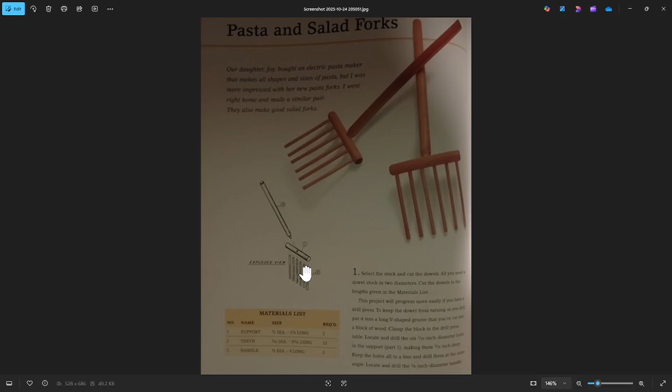So let me go ahead and show you this fork. It's a material list of 3 items. We'll have a handle, this is called the support, and then you have your teeth there. Let me show you the details. Here we go.

This angle right here, that 30 degrees, it's simple to place a handle at 30 degrees, but what I was trying to do is drill the holes out in this support piece here before inserting the handle. It's just an extra step or two that I do to help me increase my experience level a little bit quicker by trying not to take shortcuts. I think it pays off in the long run to learn these little nuances.

So let's get into it. Open up FreeCAD. Alright, parametric part, we'll start with that. And by the way, I'm not going to highlight my mouse anymore. I think when I'm looking at the videos, editing them, I can see the mouse pretty good. So if it is an issue, please let me know in the comments.

We'll start off with the material list. We had 3 items, so we're going to have 3 bodies. We got 1 body there now, so body number 2, body number 3. It's a support, we got teeth, or I'll call it a tooth, and a handle. Let's go ahead and get that.

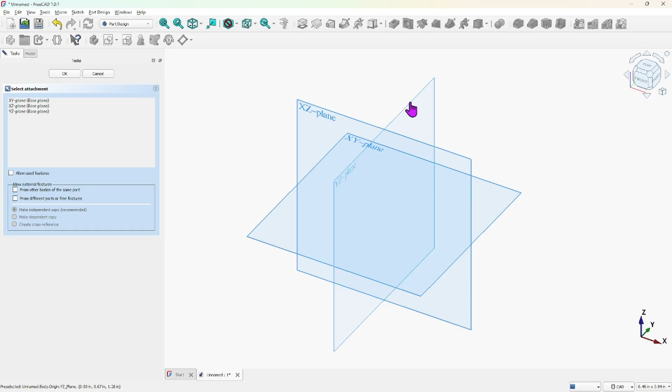And which way do I want it to face? I'll do it this way here. So I'm going to choose the YZ plane. Double click on that. And the support, this piece here...

Number one is 1/2 inch diameter, and it's 3 7/8 inch padded or in length. So 1/2 inch and 3 7/8. Go down to here, go back there.

Now earlier, I was trying to be smart and put the diameter over here and the side of the circle tangent to this line here, because I thought I was being smart. I can come back and use this line or the edge or that plane to insert or drill into that support, and it ended up making it much more difficult than it needed to be. So you would not have wanted to watch that one. I can guarantee you that.

So let's go ahead and put this circle right there on that origin, and we know it is a 1/2 inch diameter, so 0.5, and that is fully constrained. That's an easy one. Close it, and then we'll pad it.

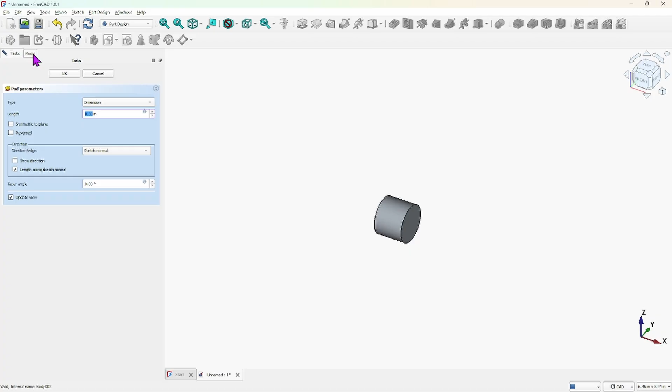Now I'm going to turn this origin on over here to show you that we're currently padding in the X direction away from this face, or that plane. Go back to task here.

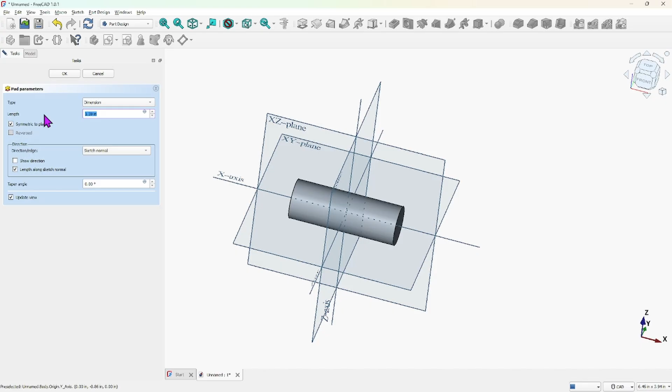What we want to do is use symmetrical, and that way you see that plane there. As you increase the size, it's going out on both sides, and that's going to help us center the handle when we attach it to this piece here or drill the hole for it. So that's going to set us up for success there. All right, the length is 3.875.

Roll back here. All right, so I just wanted to show you that. Let me go ahead and turn the origin off up here. That's off.

Select isometric view. All right, we now, or at least I want to drill the holes here for the teeth. So the hole is 3/16 diameter, 5/16 deep.

All right, wish me luck on this one. Because we can't just select that like I just did and do sketch. If you do that, you don't have a flat planar face to sketch to.

If you did it on this end, that's a flat planar, and you hit sketch, you could draw a sketch right on the end. So what do you do? You have to have, well, you could do a couple of things.

I could just start a new sketch and then use this XZ plane. But then when I tried that and moved the hole out to the side, it would not let me move it. It locked it. So what we have to do is create a plane and then attach the sketch to that plane.

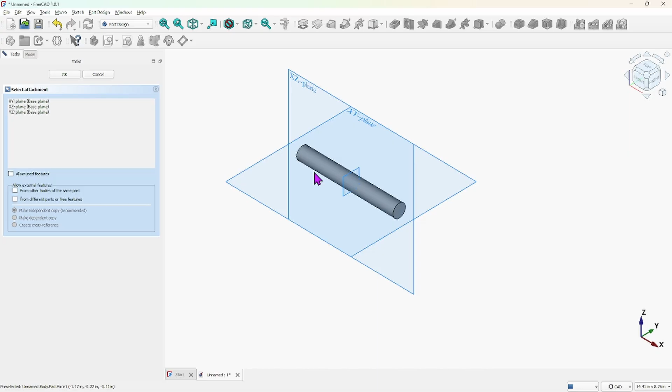All right, so let's do that. Cancel that. So before we can draw those circles, let me go ahead and get a plane.

Here we go. The plane is right there. Select a plane. The plane is deactivated. We need to select something to attach it to, and I am going to select this support or dowel. There you go. Now the plane is attached.

I have to have a way to spin that plane around though, because I can't draw the circle on it right there. So now let's work on spinning that plane around and getting it into position, and let's see what we can do here.

So in theory, the Z-axis is the vertical axis, and if you rotate the plane around on the Z-axis 90 degrees, it should position it where we need it. But it doesn't always. Yep, see, the Z-axis for this item...

This is something I'm still learning, but there's a variety of Z-axis. You got your original Z-axis, but then as you start drawing items, they internally have their own Z-axis. And obviously this plane, since I selected this, now it has its own Z-axis.

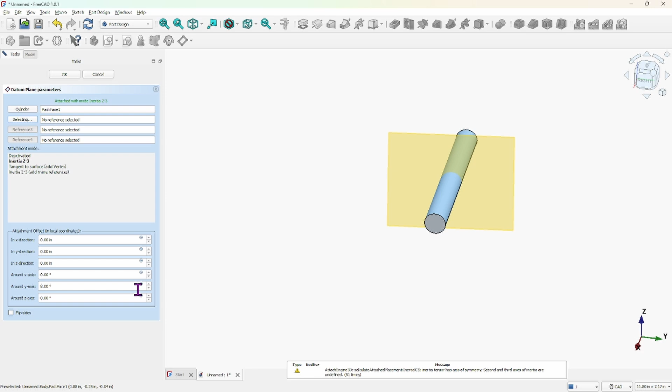No, it's not that, because you can see it's not using that. So I'm going to put that back down to 0. Okay, spin this back around. This then is probably what we're looking for.

X, let me see. Let me go back over here. Let me look at it in this direction from above, see if it's... Nope. Set that back to 0.

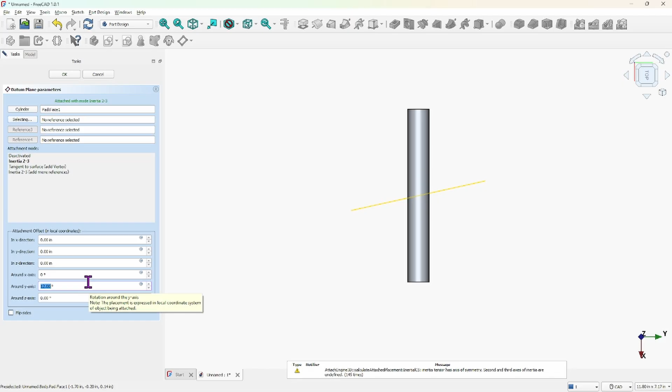Maybe it was the Y. Yeah, I think it is. Yeah, okay. So we want that to be 90. I'm just going to go ahead and type 90 while it's blue over on the left. Hit enter. Alright, isometric view.

Okay, there we go. So we have the plane in the right direction. Now we need to take that plane and move it to the left on the Y-axis. If the Y-axis is the same as the Y-axis for the plane, we shall see.

Alright, go on the right view here. I'm going to just skew the view a little bit here so we can see a little bit more of it. Alright, datum plane. I'm going to double click on the datum plane.

Now this time, instead of moving around an axis, we're going to move in the X, Y, or Z direction. I'm thinking in the direction of Y is what we should do. Let's see how that works out.

No, put that at 0. Let me try the X. Since X wrapped around the Y-axis, I don't know. Let me just try the X, see what happens there. Yep, that's what we want.

Okay, so it's already through the center of the support piece. So out to the edge here would be 1/4 of an inch. 0.25 is what I'm typing in this X direction.

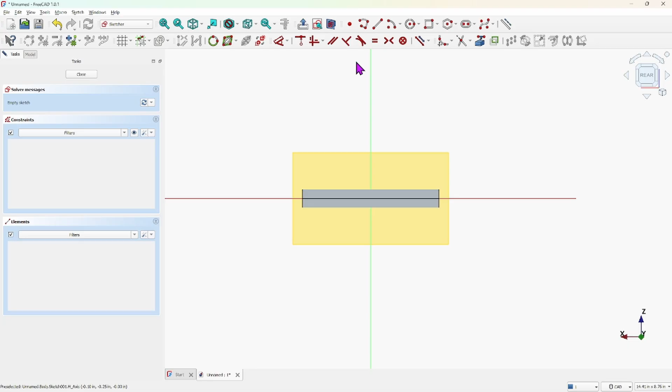This will get it out of the way. Hit that, and you can see it cleared it up right there. All right, so I'm going to start with that sketch there.

Let me look at some more information here. So it's a 3/16 diameter hole that we're going to drill into there, 5/16 deep.

Alright, grab that. 3/16. You can go ahead and type the fraction in there, hit enter.

Alright, we'll worry about these dimensions here in a little bit. I'm going to close it because I want to demonstrate something to you here real quick. That is strange. Why is it so far over?

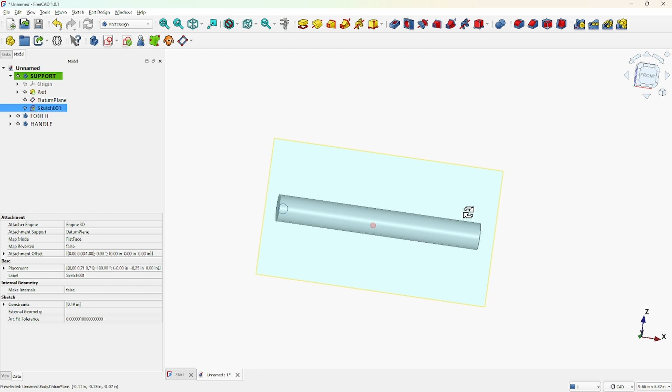Look at the datum plane. Make sure we got it right. Yep. Okay, sketch. Oh, okay. There you go, you see that up there? I didn't realize that I drew that off the edge. So I'm going to move it in some. Turn that back off, and I'm just going to drag it over. There you go, drag it over. Alright.

Alright, this is the fun part. I'm going to show you a couple things here. You know me, I'm going to try to show you more than one way to accomplish drilling the hole into this support or dowel, whatever you want to call it. So we're going to use the sketch, it's highlighted.

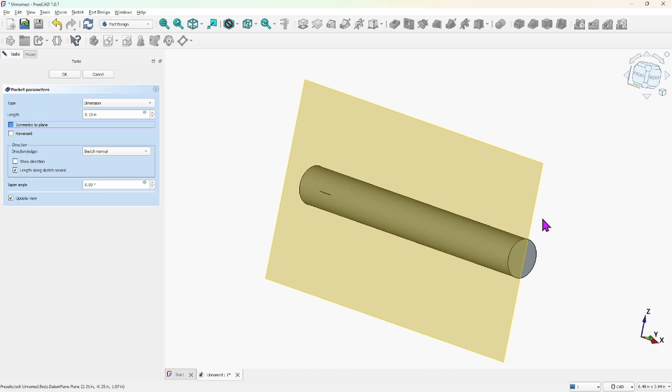We're going to use the pocket command, and something is not going right. Leave the length along sketch normal. I'm going to do the symmetry to the plane. That's what it was - it was going in the wrong direction because we sketched it on the rear side.

Let me put a negative here. Let's see if that does it. It will not allow a negative. Alright, so we will reverse it. That's why it won't allow a negative. We'll just use reversed. Okay, alright.

And it did put a pocket in there. So let me try to explain what just happened so hopefully you'll understand it.

Okay. When I selected this plane here, it should have been on the front right there. So let me go back to the sketch. There you go. Alright, but it flipped the plane around to the rear.

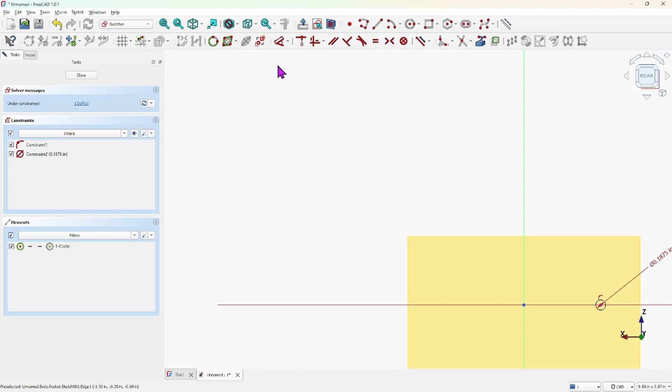So when I drew this, it was expecting to pocket starting at the rear and working its way forward to the front. And that's why when we did that - let me close it - over here to the right is the rear, and we drew it on the back side of this plane. We drew it on this side, and when we pocketed it, it was trying to go into the screen, I guess you could say, from where we drew it.

Like we drew it from here, and it was expecting to go to the left. And so what we had to do, since it drew it on the back side, I had to come up here and do the reverse on the pocket. Right here, there we go.

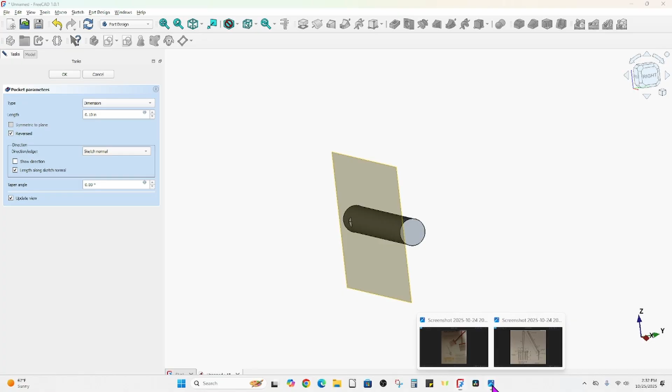So now that that is explained, the depth is 5/16, I believe, if I remember. 5/16 deep. Okay, let's go ahead and do that. Alright, so the length here should be 5/16. Enter that.

And you can't see the hole there, but we're going to make it transparent so that you can. And while I'm at it, this plane right here, I'm going to come up here and select that eye and make that plane go away. We were just using that as reference to put this pocket in there.

Alright, I'm going to select the support, come down here to view, and transparency. I'm going to set that to 60% down here, so you can see through the support and look at the hole we drilled.

Now, normally - and this is where I just can't let little details go, I guess it's my nature - that doesn't have a taper on it, like it would if you had a drill bit. So when you do a pocket, it doesn't put that taper.

This is the one you want to use right here, which is the hole. And when you select that hole, you have more options to add threads, countersinks, and things like that. And it'll act like a drill bit when it goes in. So let me demonstrate that to you. So I just wanted you to see that first.

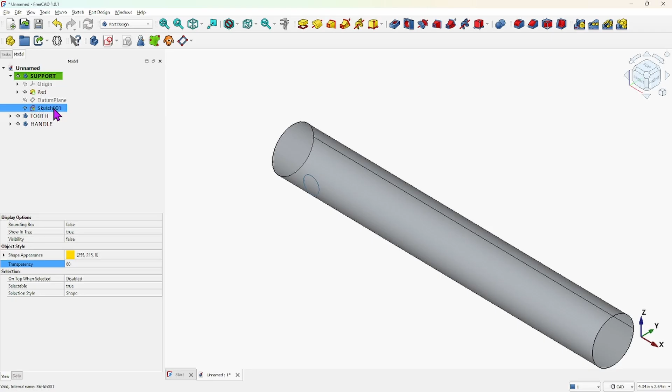Now let me see if the hole will work for me. Our datum plane is on, turn it off, select the sketch. The sketch is highlighted. Now I want to select the hole, and it's giving us that indication it gave before because we got to reverse it. Select reverse, and there you go. The hole went all the way through because the depth is set.

I don't know if that is a default or what, but we got 0.98, so it's almost an inch. We want that to go in 5/16. So I'm just going to left button, swipe over, and type in 5/16. Then I'm going to click out here in the 3D model view, left click, and it'll update the view. Now look, there you go. That's what I like to see, it feels more realistic to me.

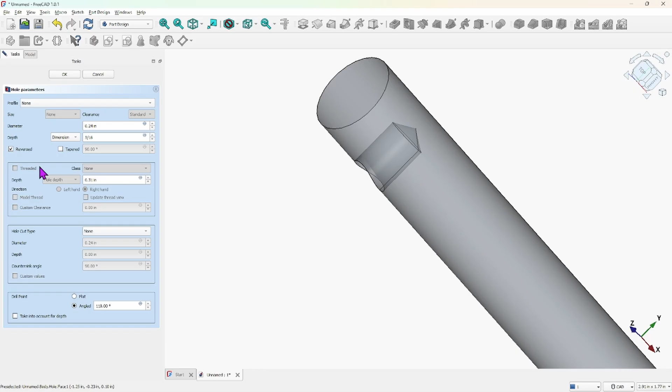This information down here is not something we really want to get into today. If we were doing machining, I think we could show some threads in here, but you'd have to come up here and select a profile, like which one of these standards you want to use. An ANSI standard is probably what we would use here in the United States. But for right now, the profile is none, so I don't think we have that option to add threads. It's something you can play with if you're familiar with fasteners. It's something I'll probably get into at a later date.

Hole cut - look at that, you got counter bore, countersink. I guess the counter bore, you can go in and flatten it out, and the countersink, I think you know what that is. The counter drill, I'm not 100% sure what that is, I'd have to look that one up. That's my background, mechanical, so I should know that. I guess I don't use that one enough.

Let's talk about the taper and the depth. Because the rod, or the tooth I should say, when it gets inserted needs to bottom out, we want the edge right there to be 5/16 from here to where you start, to this edge here. So the depth is 5/16.

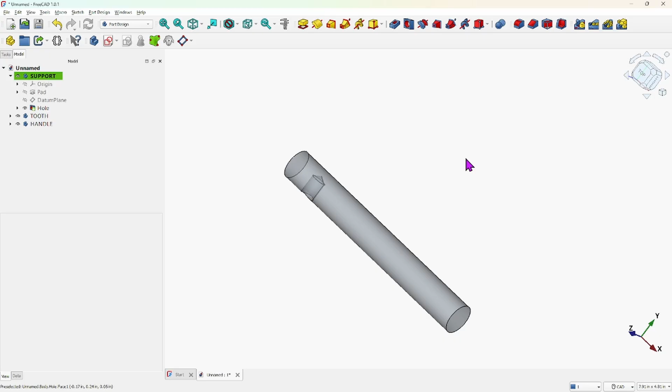So now we have to duplicate that across the support. But before we go there, I'm going to show you yet another way to put a hole in here, and that would be using this Boolean operation, which we're going to end up using for the handle, I believe. Wait till I get there. There are times when a Boolean operation might be your best friend in a situation.

So if I was to draw, just to show you another way, I'm not going to get precise with it. I'm going to start a sketch. I want to start a new body, and I'm just going to call that drill bit. Hit enter. And then now that that's active, select that. I'm going to select that plane right there.

Okay, on this line here, I'm going to draw half of a drill bit and then rotate it. Let me see, right click it out, then I'm going to use this, continuous. Alright, so we know that the tip - I'm just approximating right now - there, and to that line, and then close it, there.

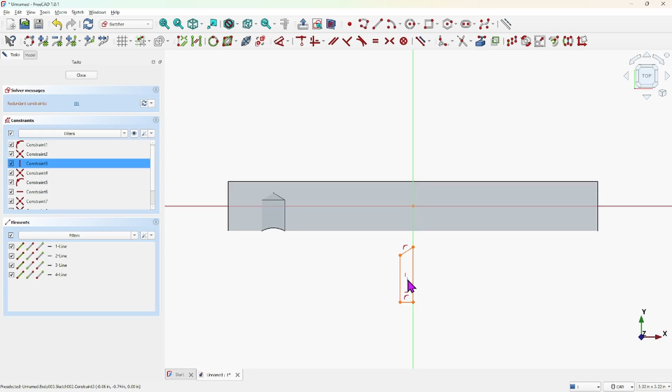Alright, it's over constrained because I attached these points to the axis, and by default it also gave it a vertical constraint, so it's over constrained. By selecting that and deleting it, I thought that would help. I grabbed the wrong one, let me back up. There you go, it should be this one. Grab that one, hit delete. There we go.

Now I am not going to take the time to dimension this one because it's just a demo, so I'm going to go ahead and close it.

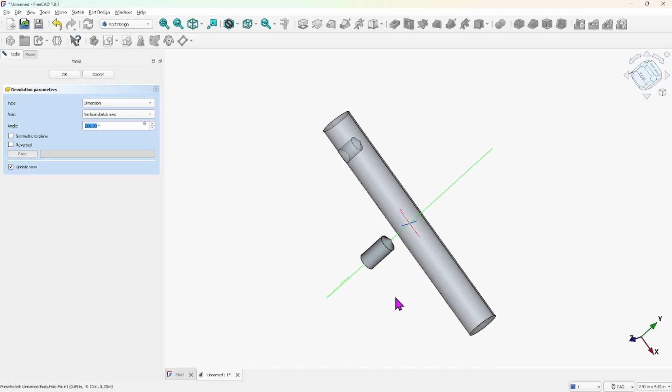Now what I want to do is rotate this to make a drill bit. The sketch is highlighted, hit rotate, and there, it rotated on that vertical sketch axis, I think that's the default. You can also pick other axes. It may or may not make sense when I do this, but for instance, there you go.

That shape was revolved around the x-axis. There it is, revolved around the z, but we don't want it around the y. Well, yeah, I guess we do want it around the y, because it was drawn right on the y-axis.

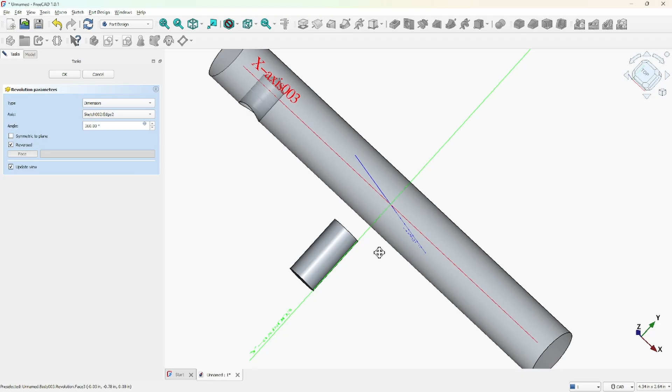Another way to do this: if you choose select a reference, then that line segment we drew here to here, if it wasn't on that y-axis, you can select it and it'll spin around that. Let me try that one. There you go. So it used that as a center, you can see what effect it had on it.

Alright, so I'm going to go back to the Y. There we go. Close out, select this. Alright, let's get into using the Boolean operation.

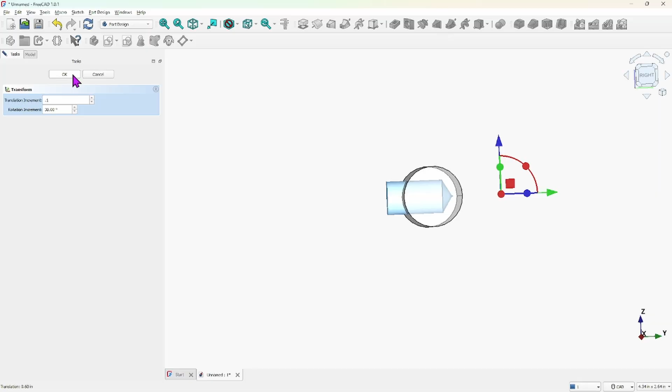But first, we got to take that drill bit and insert it, or transform it. That 1.94, that's going to be way too far, look at that, see I'd end up over there. So we need to reset the increments up here, and I'm just going to set that to 0.1. I'm going to grab this tip, and it's going to pull over in 0.1 increments. I'm not trying to get exact here, just close. Hit OK, and there you go.

You can see that it's inserted into the support like a drill. Now, using the Boolean operation, the part you're going to drill into, the main body you're going to affect, we want that to be first, and that would be the support. We want that to be active. Right click it, make it active. That's important. Now I'm going to hold down the control key and grab the drill bit.

There you go, got both of them selected, and I'm going to select the Boolean operation. Currently you see that it's not in there anymore because it fused the two parts together. What we want to do is cut that drill bit out of there, not fuse it. So I'm going to select cut, and there you go. The drill bit's gone, and there's the cut.

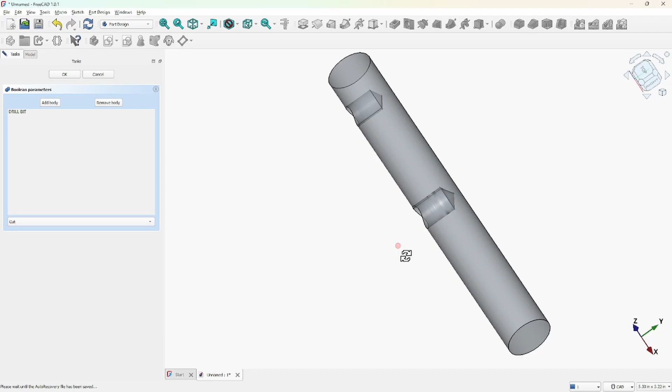And then this other one, common, you'll notice that wherever the two bodies intersect and share the same space, I guess you could say, the common, and there are uses for that, but not really today. So I'll put that back on cut.

There you go. All right, I just want to show you that there's another way to accomplish that. It'll give you more options in the future. If you get stuck, one way isn't working, you can go back and try another way to accomplish it.

Alright, so the drill, where is it? Oh okay, the Boolean, I'm going to select that, right click and delete it, because that was just for demonstration purposes. Now I'm going to delete the drill bit.

That's the beauty of having parametric. You can walk backwards. If you do something that you want to undo, you can just walk it backwards like this. And delete the drill bit. And now we're back to where we were. We got the hole there.

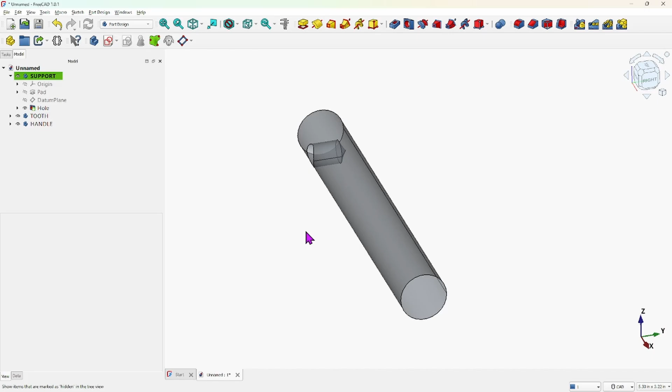Now we need to put multiple holes there along that support. I don't think I've shown you the linear command yet, but that's what we're going to do. For the linear, you can only do it within one body. Like I demonstrated just a second ago, the Boolean, you had to have two bodies.

Well, with these icons up here, what's that, mirror? That's mirror, yeah, mirror, linear. It should be polar, can't remember. Oh, that's multi-transform, I don't use that one much. But you have to have a feature, a sketch, or something within the active body for it to work. So let's give that a try.

So we're going to take this hole right here. You don't want to select it here, I've tried that and it doesn't work. You have to, I tried so many ways to break the system, you have to select this edge of the hole right there.

And then up here, you select, with the body active, and the hole automatically got selected there, but for some reason you have to select it out here in the 3D view. All right, that's good.

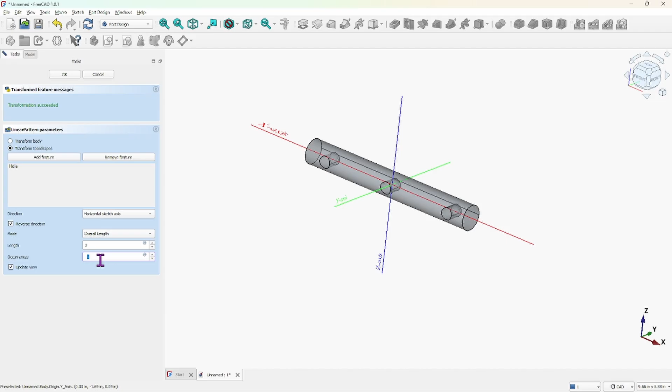Let's see how many holes we need. I'm pretty sure it's 6. 1, 2, 3, 4, 5, 6. 6 holes. Go back here, and I'm just going to type that as 6 holes. And it updated in real time. There you go.

Okay. However, that 3 is the incorrect length. We need to go back and do the math.

And I've done this earlier. I think 5/8 times 5. Yeah, that came up to 3 1/8. 3 1/8, double check it. So 5/8, 5 divided by 8 equals, and then times 5 spaces. Yep, 3 1/8.

Okay, just double checking. So this length should be 3.125. All right, and that made the adjustment. There we go. Go ahead and close that.

We're getting there. We got our support, we got it drilled out. I know we could have done this quicker in the shop than here, but it's all part of learning.

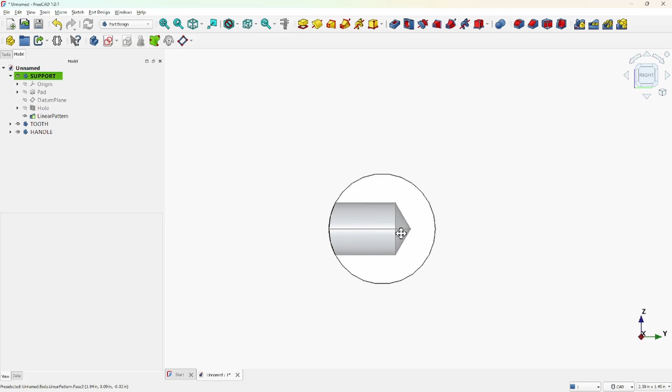All right, so now what we want to do, we go to the right side here. We're going to be looking down the right side. We want to drill a hole in from here, but we want that hole to come in. I think it's at 30 degrees. Yep, 30 degrees. It's a 1/4 inch hole.

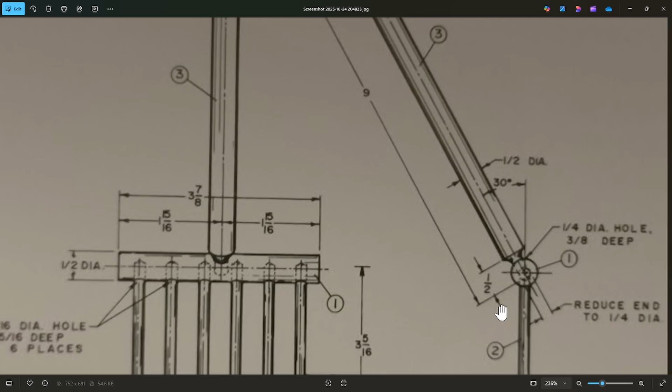All right, so this will be fun. I might have to do a little math here to get this right. All right. All right, let's just go ahead and get it started, and then we will figure it out.

All right. What plane? I'm going to start these. Oh, here's the handle. Okay, we definitely want to right click on the handle and make that an active body, and then start a new sketch. We're going to be on the YZ plane because I'm going to design the handle from the side and then rotate it.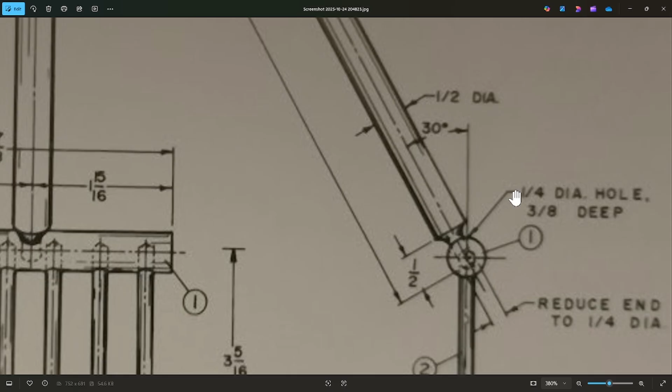All right, let's go look at that a little bit closer, see what it looks like. So you see it's got a little curvature in there. It's got a piece that gets inserted in there. It's 1/4 inch diameter one end, but the overall diameter for number 3 is 1/2 inch diameter. 1/2 inch, a little bit on. Okay.

All right, back to FreeCAD. All right, use this. There you go, vertical symbol. Horizontal symbol. Now, I think on the keyboard I can type M for mode. Let me see if that does it. Yeah, there you go.

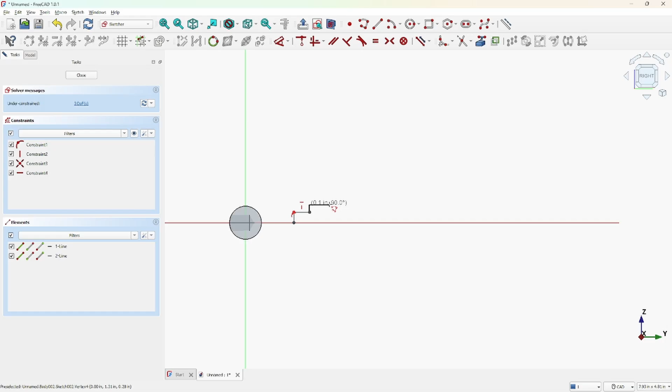Type M again. Type M again, and now we got a radius. That's exactly what I wanted. Put a radius there. And type M again. There you go. That free mode there. And we want the horizontal symbol showed.

And this is going to be vertical and coincident to that line. Select that. And then if we click from here to here, we're going to get an over constrained because this y-axis here, I've already got that point locked in, that point locked in. There's no sense in having a horizontal constraint. But let me go ahead and do that anyhow. There, right click to get out of that. Then I'm going to select that constraint and on the keyboard select delete and get rid of it. There we go.

Alright, now we can start putting dimensions on it. Okay, for right now, because there's something I forgot to do. I forgot to put a hole in that piece, but that's okay that we did this sketch. I think we can borrow parts of this sketch to kind of set us up for success here. Or not, we'll see. We will see.

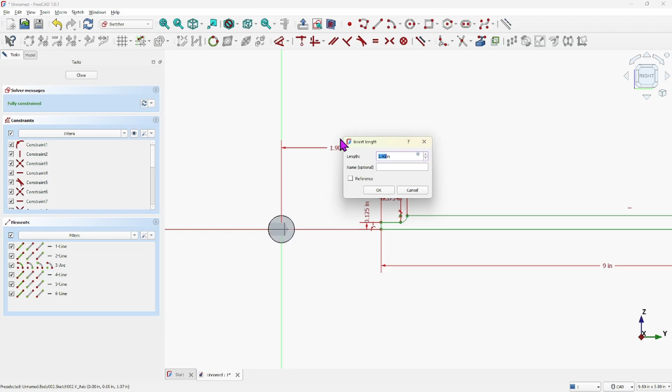I'm just going to set that handle just an inch away from here for right now. So from the tip of that handle to the z-axis, I'll call that 1, enter, and it's fully locked in. All right, let me close it.

We have a handle that's ready to go in there, but we don't have a hole for it yet. I am excited to see what that handle looks like, so let's go ahead and rotate it.

While it's highlighted, because the sketch is selected, the handle body is active. We're going to hit the rotate, and we lost it, so we're going to use this symbol up here to pull it back. There you go. So what's happened is the default is to rotate everything around the z-axis, the vertical.

We want to rotate it. We drew it on the x-axis, I think, so we want to rotate it on the x. We'll see. X. No. Y. There you go. Yeah, rotate that profile on the y-axis. Now we have a handle that's ready to be inserted.

Oh, you know what? These holes are not equally spaced on that support, so we can take care of that real quick.

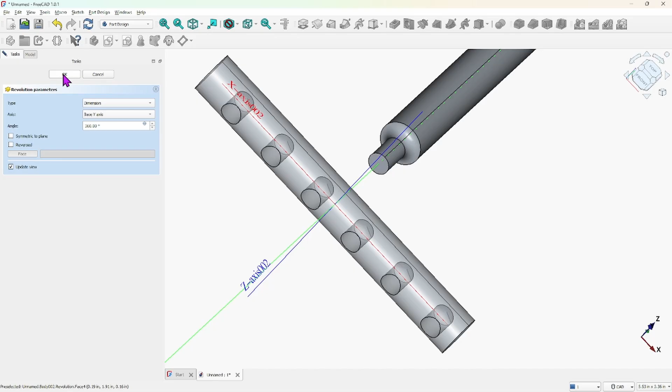Let me hit OK here. The handle looks good so far. Yep, I'll go with that.

Alright, so now let's equally space the holes. Let's go to the front here. Let me ISO, just trying to get a strategic look at it. There you go, that'll be good.

Okay, alright, so I want to go up here to the support and I'm going to right click and just make it active body. Go down to the linear pattern.

No, I'm going to have to go into the hole because that's where the sketch is. See that sketch right there? I have to set it to the end of the, alright, let me close that.

Set the linear pattern. I did the math on this earlier, and with the 5/8 between all and the overall length of the support, it turns out that from the center of the holes out to the edge is 5/16 of an inch.

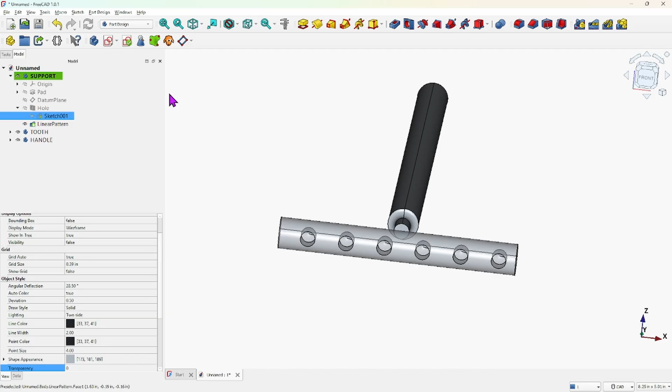So I have to move that sketch over. All right, let me get it set up. Double click on the sketch.

Model tab. No hole. Oh, okay, I know what's going on there. I'm wondering why I can't see the hole or anything, but if I use this dot here and flip it around, I should be able to see it.

Yep, there you go. Flip it around again. Flip it. And turn it on. Okay, the reason being...

Is you see where it's drawn right here on this plane. When you're drawing the circle, we're over here on the right side looking towards the left, and all of these are behind you, I think. Let me double check. Yeah, so if you flip it around now, they disappear, because as you're looking, they're behind you, if that makes any sense, I hope.

If your eyes were up here on this ZX or XZ plane. So what I'm going to do, flip it around, use this dot here to go 180. All right, and then we're out to that edge from there to there.

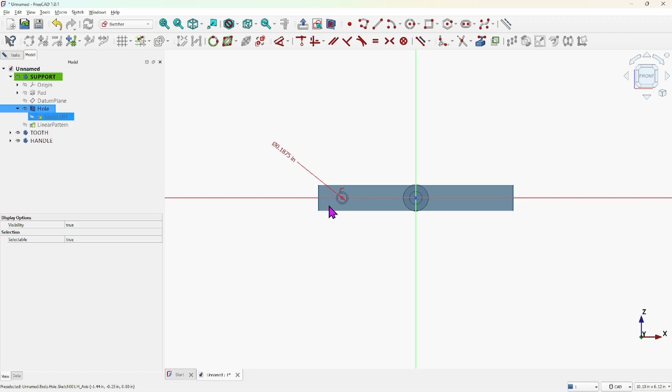I can't reference it with this, it won't. So I'm just going to have to do math. Try that again.

5 divided by 16 equals 0.3125. Then I'm going to add a plus sign, plus 0.625 equals, and then we're going to add another one, plus 0.625. Okay.

So it was 9/16, not 7/16. All right, let's see if that works. I'm going to copy that, and copy. Go back into FreeCAD.

And now I want from there over to the center here. Oh, so from there to center, that, and now I should be able to Control V to put that number we calculated in there. Hit OK. Great.

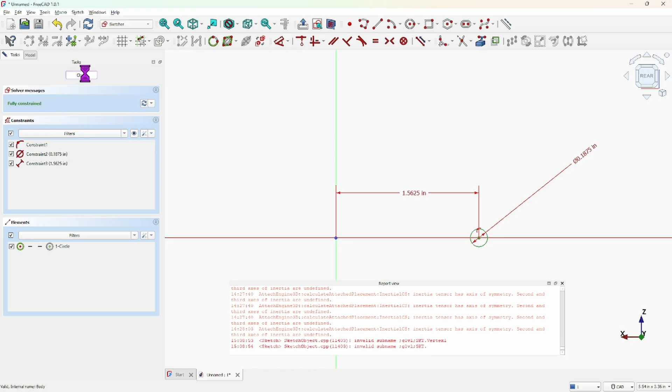There you go. Now when I close the sketch over here on the taskbar, it's fully constrained. I wonder why I didn't constrain that to begin with. Oh, that's right, because I was just demonstrating the different types of holes for you. Okay, looks like we got it all lined up now, centered. Yep, looks good to me.

All right, where were we? We got this, and now we need to drill a hole on the back side, but that hole has to be 30 degrees. Yeah, if I try to create a plane, it might let me do it.

Let me try, see if I can do a plane. So I'm going to try another method.

I really need to get up to speed on planes. I've used them in the past. Sometimes they work really good, and then sometimes they give me troubles like they did today. So I'm kind of glad you saw that. You got to keep your eye on the details.

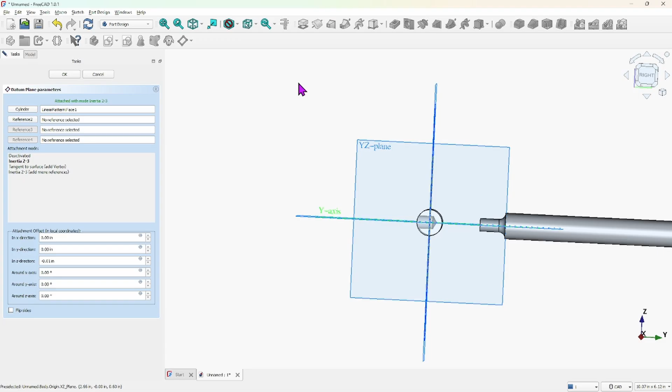I noticed that plane when it was laying in relation to that circle, it appeared like it wasn't on the center of that circle. Oh boy, okay, cancel that. And it shows me a weak spot that I need to work on. So I'm just going to delete this datum plane.

And now I'm going to use the Boolean method. Like I told you, some situations the Boolean will be your friend, and today is going to be that day. Alright, so let me turn the origins off up here, and we're just going to drill right into there.

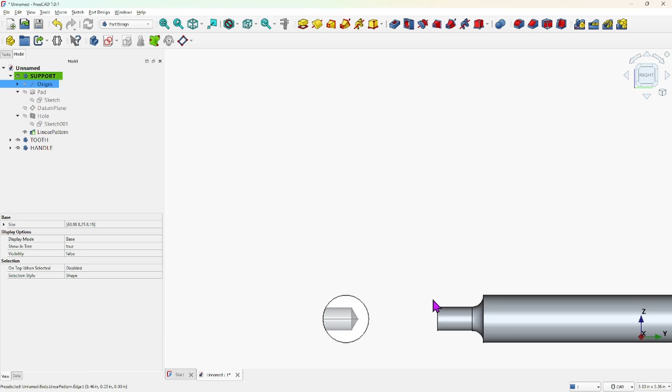Let me do a right side sketch. We'll do a profile. Right side. It's going to be a separate body, and I'm just going to call that, like I did earlier, just drill bit, because we're going to drill into it.

Uh-oh, I deleted it. No, everything's intact. Handle. Yeah, alright, so the body, new body, I accidentally deleted it, sorry. Right click and rename it to drill bit, and enter. Alright, now that's the active body.

You can start a sketch right here on the YZ plane. Double click. We'll use this icon up here to clear the model out of the way. Alright, I don't know if I can use that as reference or not. No, it would have been nice.

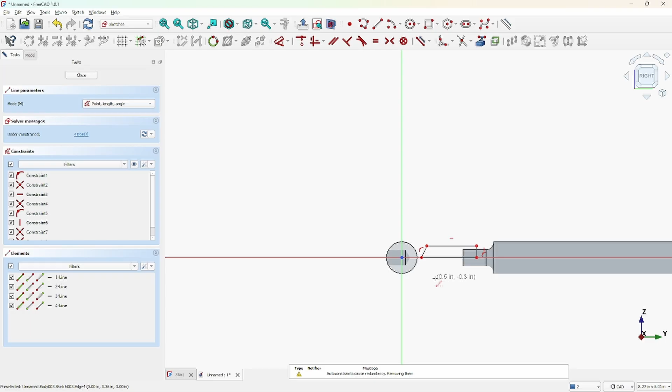Okay, so on this drill bit, I'm going to go from here. We'll figure out the angle in a little while. And then we'll select again. There, and then go from there down to the y-axis. And then from there to there, and then we're going to get that over constrained. No, we did not. Yay, no over constraints.

Alright, so let me just go ahead and set some lengths here. Yeah, set that length there. And I'm just going to set it to 1. And there we go, my keypad number was off. So I'm going to use this up here to bring it back.

And where were we? Here we go, on the left side. Turn my keypad number on. I don't know why it keeps turning off. Set that there and set it to 1. There we go. Nope, backspace. Now set it to 1. Come on, 1, enter. There we go. It flipped around.

Okay, alright, now we're back to where we started. And we know that we wanted that to match this, where it has to be inserted into that part. It was a 1/4 inch diameter, so that should be 1/8. This line segment should be 1/8. Grab that line segment and point 125, enter. There we go.

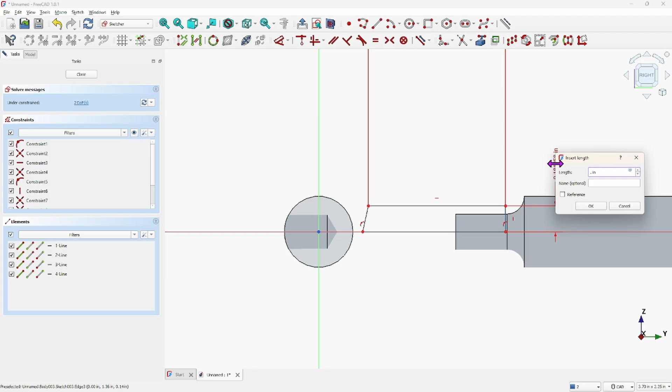Now we want to give this an angle. So from there to there, angle. So 118, we said it was 28. 118 is the angle of the taper minus 90, that should be 28. I mean, no, actually 118 is what we want. 118. There you go.

Okay, I think it just needs to be, it's all locked together as a drill bit, but it just needs to be positioned here. So how deep do we want to go into that part? I think it said it was 3/8 deep. And then we got to angle it. Oh yeah, we got to angle it after that.

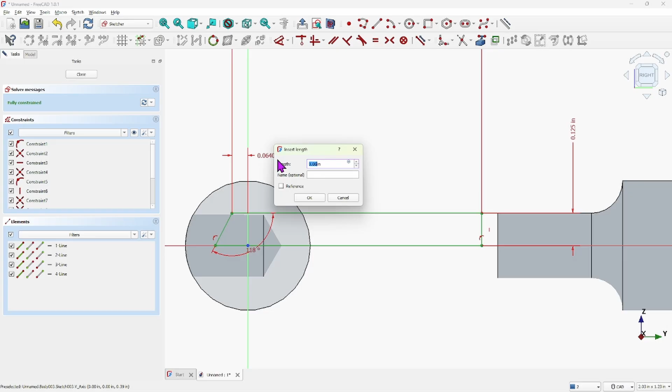And then from there over to the left is going to be another 1/8 of an inch, 3/8. So I'm going to pull that over to there. There you go. And we just want from that to that vertical line to be 1/8, and that should overall make it 3/8. So that point, that line, dimension, and I think it's 0.125. I'll grab my keyboard. 0.125, enter.

Okay, let me close it, rotate it, and then we can use a Boolean. But actually, before I do that, I want to rotate this. Yeah, let's go ahead and try that. I'm thinking I want to rotate this, swing it up 30 degrees now, but I believe that since I put this support piece on the axis, the x-axis, when I do the transform, it's going to automatically use these coordinates and that center point to spin it on, which would be perfect.

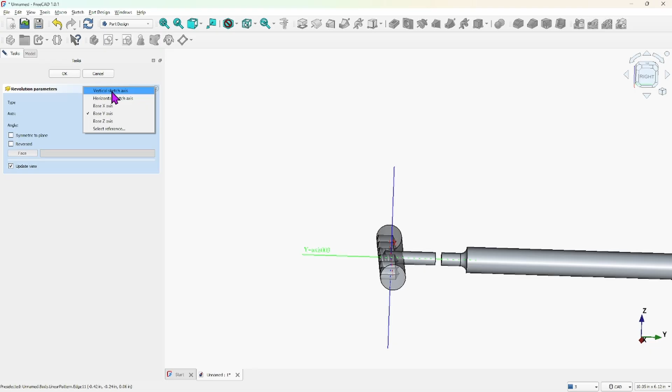And if that doesn't work, I'll have to come back to the sketch and angle that in. Alright, so this is a profile. I'm going to rotate it around the y-axis. Get out of here, close it. It's highlighted. I'm going to hit rotate, and remember, it always likes to spin it around the vertical axis first. Don't be alarmed. Did I do that right? Vertical axis. What's going on? Let me do the Y. There we go. That's strange. The vertical, why didn't it do? Huh.

I think I know why - it says update the view. Reverse, symmetrical... no, but anyhow, we got the results we're looking for.

Now that drill bit is into that piece, and we want to rotate it up. Let me hit OK.

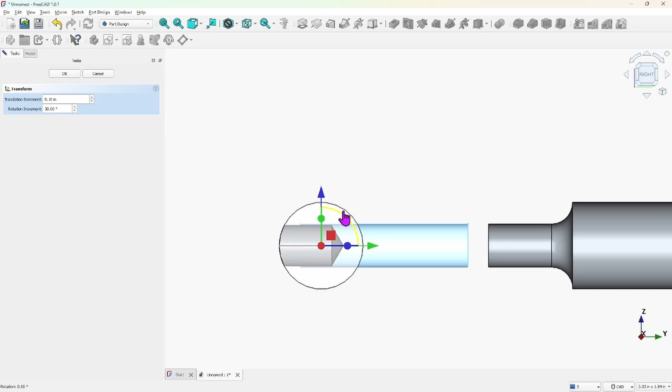Here's the drill bit. Over on the left, I'm going to right click and transform it. Yes, that center point is right there where we need it. That is so nice. This is already set to 30 degrees, so I should be able to just grab that red circle, and there we go. Close it. And there's our drill bit inside the piece.

Now let's go ahead and make the support piece active. Check that. Then hold down my control key and select the drill bit. And then we will select Boolean method, and we want to do a cut. And there we go. Select OK.

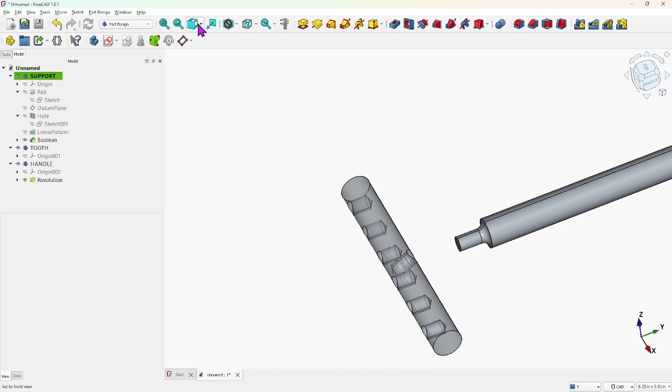Okay, so now all we have to do is get that handle inserted, and then the rest of these should be pretty easy. Here we go, like so.

Alright, right side view. Just out of curiosity, when I do a transform on that handle and rotate it, let's see if it's lined up on this center point or not.

Hopefully it is. There's the handle. Right click it, transform it. Yep, that's good. That's the beauty of using the origin, I guess is what it's called,

of the sketch. So now I want to go in there on the sketch and move that in, and I want this piece right there to overhang by 1/8 of an inch, and that'll give us 3/8 deep, and then we can rotate it up and it'll be into the hole.

Alright, select OK there. Go back to the handle sketch. There's the origin, revolution, double click on the sketch, there it is.

So we want to delete that 1 inch. Delete that. And that should give us the freedom to move that over.

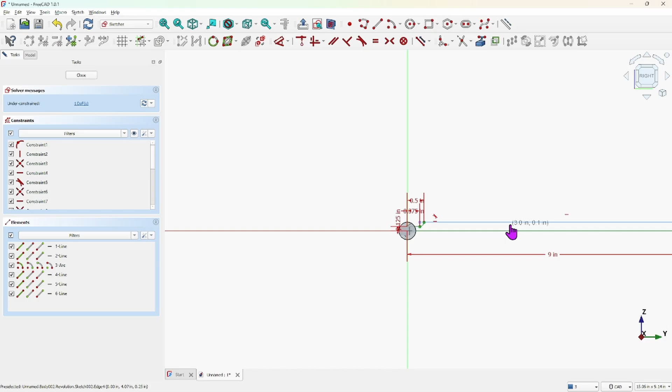I'm going to go up here and select this to remove some of that out of the way. Hey Max.

Alright, move that over. Get the end of that past the line there. And from there to there we want 1/8. There to the vertical line.

Dimension 1/8, 0.125. There we go.

Alright, now we can close that. I know, Max, I'm almost finished. Well, not quite, but we're getting there.

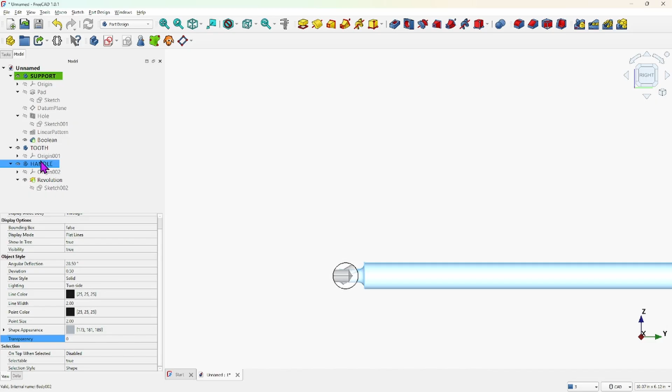Alright, let me rotate it. The handle, right click, transform. It's already set to 30 degrees. Grab it, and it's going to be right there.

We overshot it by 1/8, and it should drop it right in that hole. Hit OK, and life is good. And it's bottomed out in that hole. Wow, yay.

I might have said it earlier, but you could probably build this faster in the shop than this, but it is good experience.

Alright, I think the rest should be downhill from here, but we'll see. We shall see. I know, Max. All we got left is the teeth.

Alright, I'm going to draw a tooth, and then we're going to make clones of it. And after the clone, I'm going to show you how the parent-child relation works on clones. So let's go ahead and give that a try.

Alright, instead of drawing a circle and padding it, which actually I could very easily do, and I could put it where I need it.

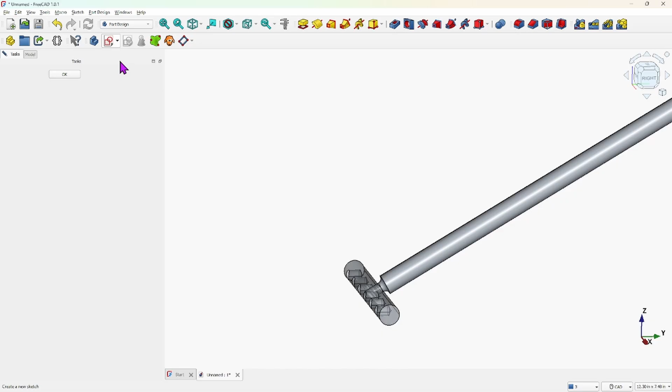Alright, let me go to the tooth here. I'm going to right click and make that an active body. Turn the sketch on, and I'm going to go with the YZ plane because I want to draw a profile and build the tooth that way. There's a reason why I'm doing that, which I'll show you.

Go up here and remove some of that stuff out of the way for me. Hey Maxie, I know.

This should be just a simple triangle here, from that line - I hope it got on there - to here. Alright.

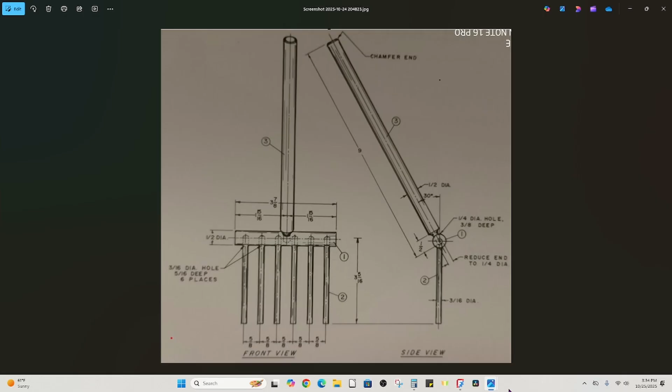Alright, the diameter is 3/16, so 3/32 will be the height of our profile. So this line right here, 3/16. I think it's 0.1875, but I'll just go ahead and do 3/16 and let it do the math. Yeah, 0.1875, yep. Alright, we've got that.

I want to know the length. I should have got that while I was over there. It appears to show that the end to end of the tooth is 3 5/16.

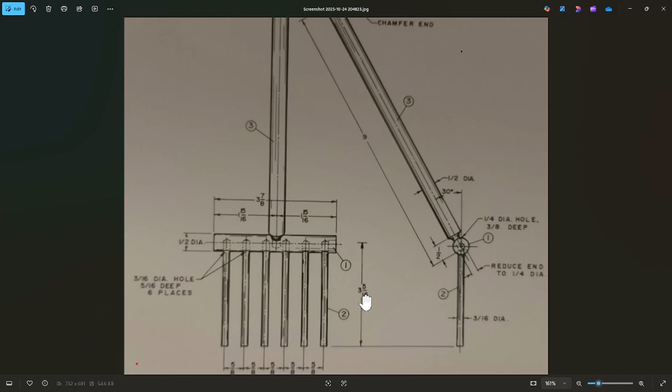Now my other cat has joined us up here on my desk, so you might hear both of them talking to each other. One is a Bengal and the other one is a young Siamese. She's about a year and a half old. The Bengal is a boy. They get along pretty good.

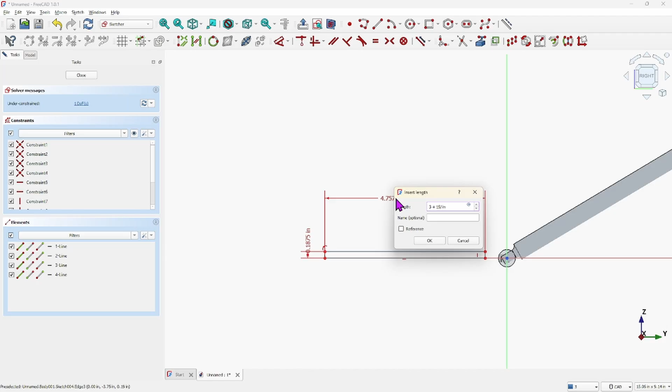Alright, the length is 3 15/16, so I'm going to just set it to 3. Hey Jolene, select that line, select it again. And hopefully this works. So I'm going to go to space, and we'll go plus, and we'll go 15/16. Hit enter, and it did. Yay, love it when it does the math for me.

Alright, 1 degree of freedom. What is that going to be? Oh okay, it needs to be set in there, that hole there. Oh, it's supposed to do half of 3/16, so that should be 3/32. 3/32, there you go. Now it looks like it'll slide into that hole there.

Nope, nope, nope, nope. Come on Billy, get it together. It is 3/16 diameter hole. 3/16. So maybe I have the holes wrong, the wrong size, because the profile should be 3/32.

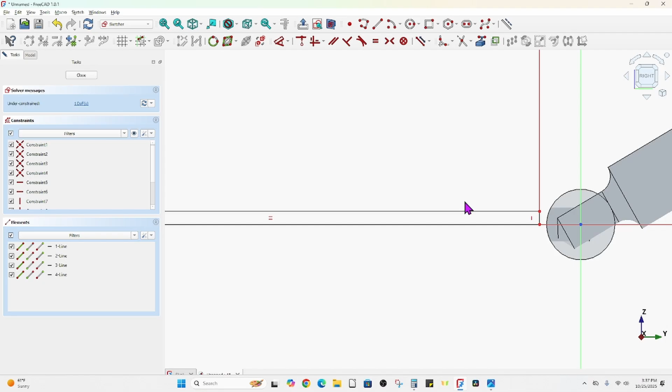Do that again. 3/32, yeah. Okay, and it looks like this hole right here, maybe when I was doing the demo I wasn't paying attention, but that hole looks like it's too big where it goes in there, so we'll fix it.

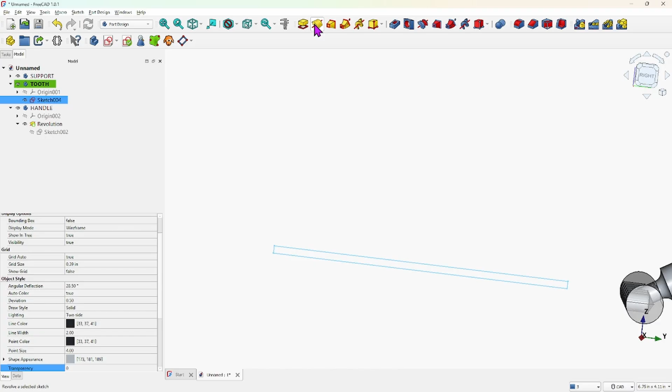Alright, I'm just going to go ahead and just pull it back, just for the fun of it, I'm just going to make it 1 inch off of that line there for right now. Close it, and we are going to, while it's highlighted, revolve it, and again it went to the Z axis. We want it on the Y axis, so we come over here, select Y, there we go.

And those holes are definitely too big. Alright, hit OK. Okay.

It's a little easier to draw it without having to talk, but when I try to talk my way through it and explain it, it's not as easy, and I lose my focus.

I'm just making excuses. Alright, support, pad, hole. There it is, the hole, the sketch for that hole. Right there.

Huh. 1875. Well, daggone, that looks right. That's pretty wild. That is wild. Oh, you know what?

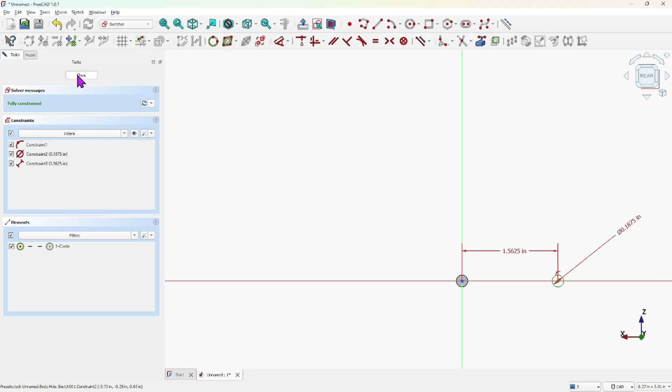When you use the pocket, it'll use that dimension there, but when you use the hole, I think you have control over the diameter, and that might be what the problem is. So let me close that out and go over here to the hole.

Right click on the hole, edit the hole. Look at that, yep, that's exactly what it is. So it overrode the sketch. Wow, man, man oh man oh man.

Alright, I think it was 1875 which was 3/16, but I'll just go ahead and put 3/16. And then I'll select OK. And you saw the hole get smaller there. So that should have fixed it.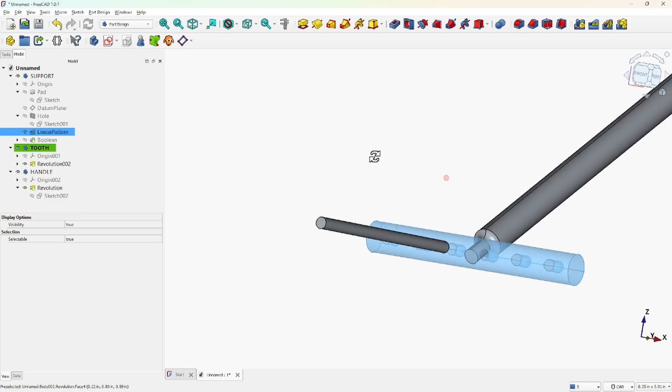Hide the holes. Now the linear pattern is what I need to turn on. There you go. There we go, that looks like it's properly sized now. Whoa.

All right, alrighty now. All right, so what I want to do is go from the center over to there to get it aligned. Yeah. So...

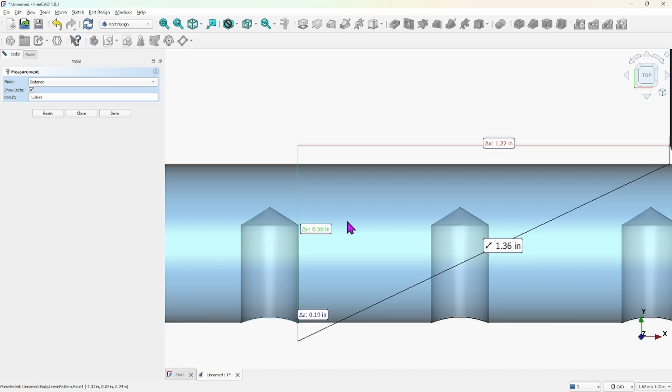Let's see if it'll do that for us just by selecting that wire right there. Select that wire, hit the measurement tool, and then select this wire edge, and I want to look at it from the top and see. Okay, it's giving it to me to the edge of that hole. Edge to edge, but not center.

All right, close that. Back to the drawing board, not drawing board, but just back to the calculator. Usually I would have a pad of paper near me and write these dimensions down as I'm doing it. All right, so currently the tooth that we've drawn is right here on this center line. We need to get it over to here. So we have 5/16, and then we got 5/8, and then 5/8.

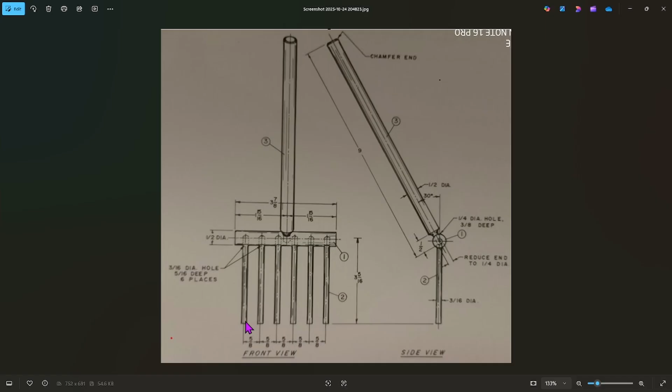You know what, forget the calculator. Let's just do it incrementally. Here's the front. I'm just going to curve it down a little bit, pull it over. And let's see if we can use the transform on that tooth. There's the tooth. Right click it, transform.

And we know the first increment we want at 5/16. So 5/16. I'm not going to select OK. Do that and it should align it. Pop right over there to that hole. There you go. Now I'm going to go up here and change that 16ths to an 1/8.

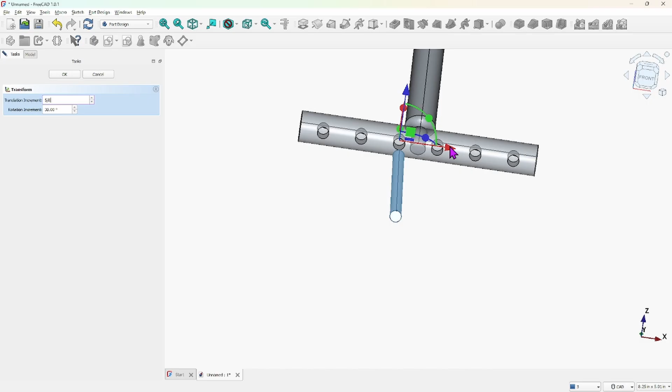And the tooth will move over in 5/8 increments. Increment 1, boom, boom, there, we're aligned. Okay. All right, now we have to put it in there.

Okay, so I know the center, and the sketch from here to the center is 1 inch. That's why I used 1 inch in the sketch. And then we need to go past that center to the right, like a 16th or an 1/8 or something like that. Let me pull this sketch up.

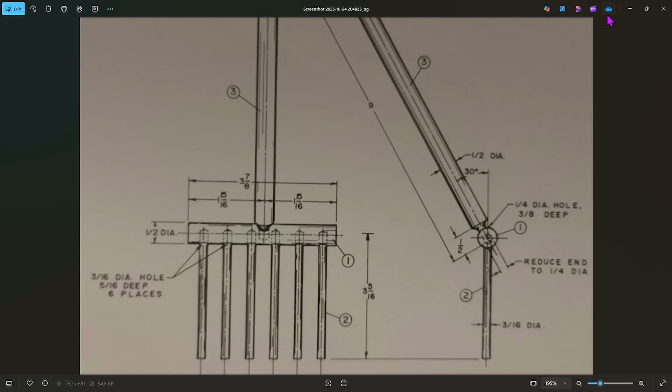It's 5/16 deep. So in 16ths, that would be 4/16 to the center. So a 16th past that would bottom out that tooth into that hole. Go into FreeCAD.

All right, Max. All right.

And here we go. Go to the tooth, right click it, transform. We know that we have 1 inch from here to the center.

So let me change this to 1 inch. Let me drag it in that direction. And there it is. Now it needs to go into that hole a 16th.

So now let me come up here and make that a fraction, 16th. And where is it? There it is. Grab it, pull it over, and there, it bottomed out in the hole. Okay, yay.

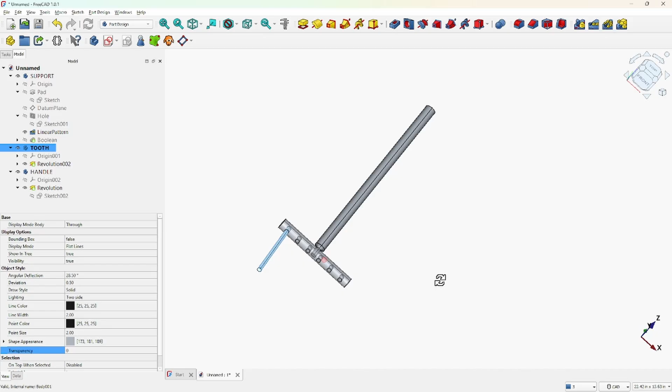Getting so close. All right, now I'm going to clone the tooth here and make them teeth. I'm just cleaning up the structure over here on the left.

So this tooth, while it's highlighted, we need 1, 2, 3, 4. We need 5 more clones, so that's this clone that I showed you in the last video. Let's make 5 of them, because we already got 1. We need 6. So 1, 2, 3, 4, 5, 6.

So we got tooth, I'm going to rename it. Call it tooth 2.

Shift home, I'm going to copy it. Control C and enter. Go down. F2 key, Control V, back up 1, call it 3, go down. There we go. Tooth 4.

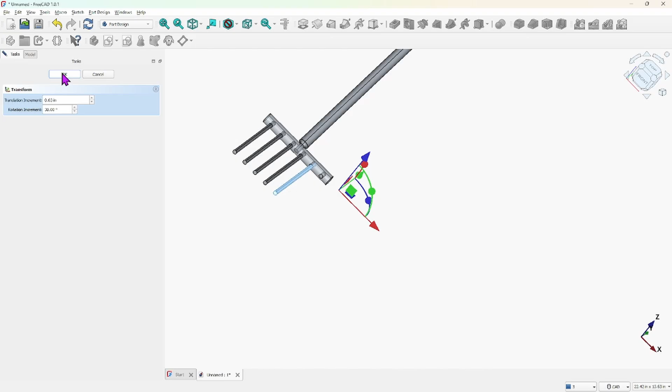There's probably a quicker way to do this, but for right now I tried to do it up here with the linear pattern, but it won't work with bodies. It's something I have to figure out. I could probably set it up in a spreadsheet to do this function, but that will be for another day. Pull that over, boom, boom, boom, boom.

All right, drop it in the hole right there. All right, get that set up there. Okay, verify, everything's in there.

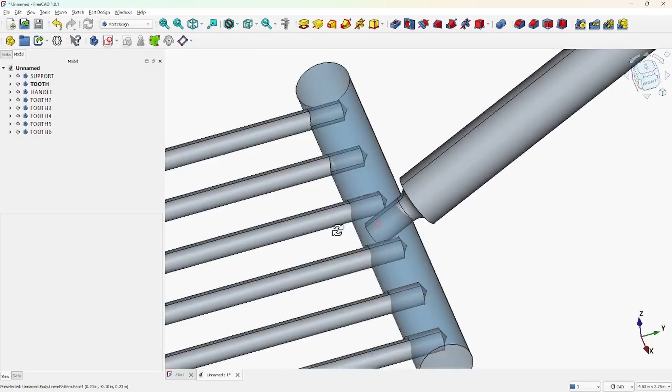The only thing we lost right here was that depth. Let me go back. Look at the handle - no, it would have been a Boolean with the support.

Here's the Boolean, the drill bit. Turn the drill bit on. I'm going to make this handle go away because I think I got the handle pushed down into it too far.

I'm going to click on the handle, and I can use the eye or the space bar on my keyboard, space, and then turn this Boolean on. Yeah, look at that, huh, that's strange. All right, let me turn the drill bit back on with my space bar. Oh, that's the drill bit.

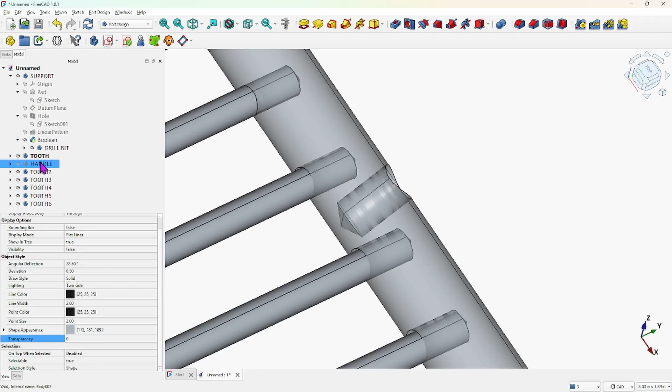Turn it back on. I want the handle. That's what I want, I selected the handle. My space bar, it's back. Okay, it might be my processors, I've got so many things going on. It's not calculating, refreshing, I'm pretty sure that's what it is, and that's why it disappeared.

That little taper - sometimes if your computer is having a hard time with the computing, although this isn't like we're doing FE analysis, sometimes it's good to just close out of FreeCAD and come back in. It kind of resets the buffers, your RAM, and your computer will work better, especially if you're doing a lot of functions at one time and deleting things. I've run into trouble in the past.

All right, so what I want to show you is the cool trick - now that we know that we have the parent tooth and then all the other tooths are the clones, or some people would call the child, if you modify the parent item that you cloned from, it'll translate across the rest of them.

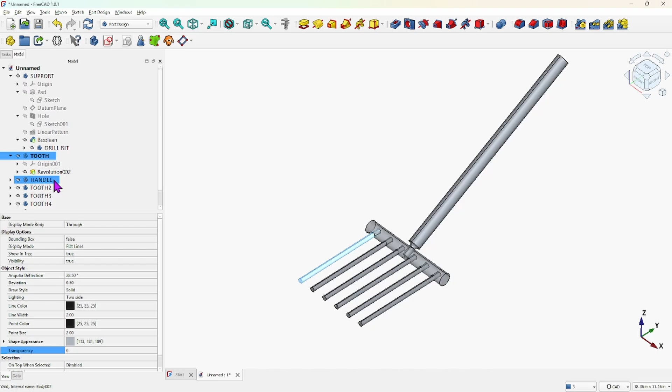All right, so let me open it up. Almost done. All right Max, hold on buddy, almost there. Go to sketch.

And then there to there. There you go, and then I will just trim it out. Trim it - 6 degrees of freedom. Now I could go in here and dimension all this and angle it and all that, but this is just a demo, so what I'm going to do is just close it and show you the effect it has. There you go, see?

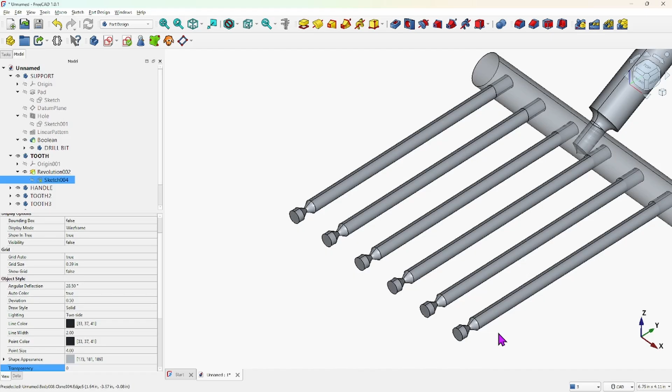It changed the parent and also changed the children. So that's the beauty of using clones - they're associated with the original that you copied from, and when you go back and change the original, it transforms or translates across the other copies that you made from the original. So I thought that was pretty cool.

All right, I'm going to restore this back. There we go, put it in position. Yay, now we got to do our final coloring.

Grab every one of these, select all - I don't think I can do a select all. That, hold down control key and just select away. Go down here and change the color, and hit OK.

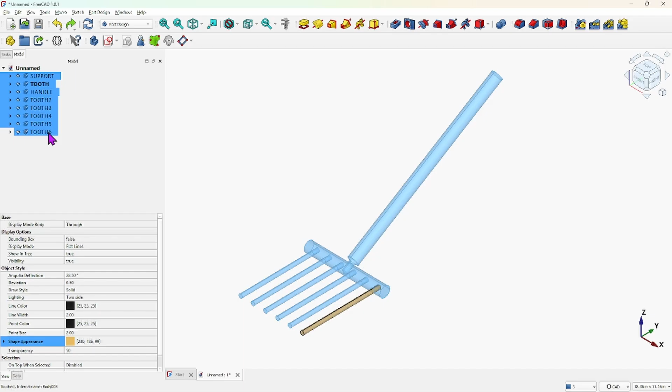And there we go. All right, I'm going to change that color, make it a little bit darker. Use this slider up here, slide it down, just darken it up a bit. And there we go, not quite a wood color, but it's better than gray. There you go, there's your salad fork.